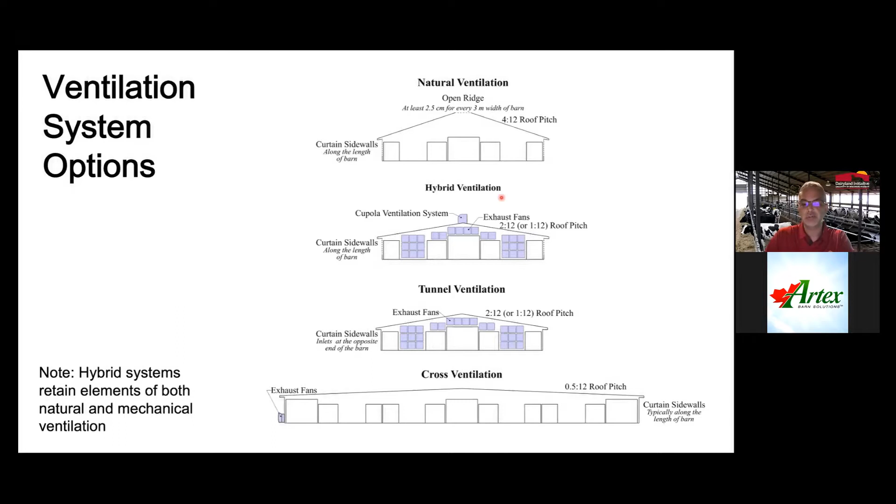Just some terminology when we use the term tunnel versus cross ventilation. When I use it, I refer to tunnel ventilation, moving the air in the direction of the feed lane, so down in line with the feed lane. And there are some subtle differences in how the air interacts with the cows here at the feed bunk relative to tunnel and cross ventilation, where we're moving the air perpendicular to the feed lanes. And so that's what I'll mean by using the term tunnel or cross.

I know some folks use the term cross tunnel, and I don't know what that means. I just get very confused. So this is what we mean when we talk about tunnel and cross ventilation. It relates to the direction of the airflow, generally relative to the feed lanes.

So why all the interest in different systems? Well, I think it relates to the kind of cow we're trying to keep in these barns now. Those older naturally ventilated barns that kept lower producing cows tended to perform quite well, but as cows produce more milk, here a 120-pound average cow creating over 6,000 BTUs, British thermal units of heat per hour. And it's the cows themselves that are driving this. They're generating a lot of heat within that barn. Those older systems are not able to cope with that.

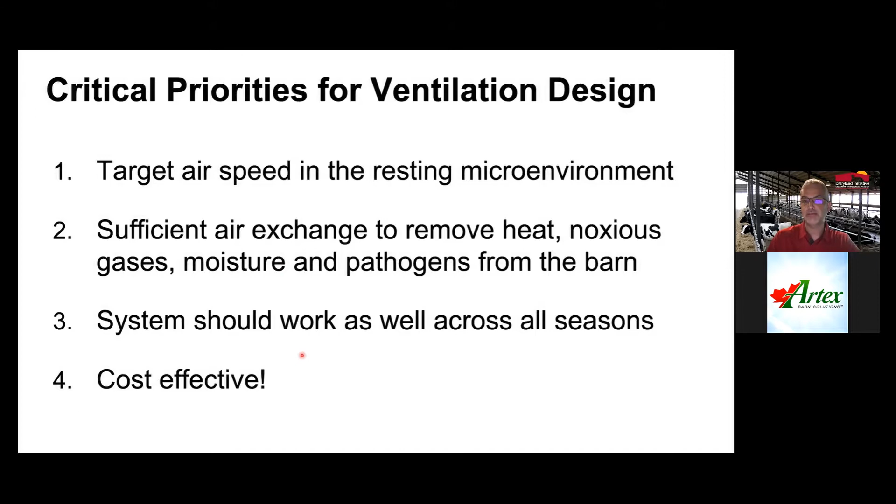And then the 4th piece is making sure that within the region that we're building these systems, the system has to be cost effective. It has to pay for itself. So those are the critical priorities for ventilation design. There are some practical design recommendations, and unfortunately, the engineering research hasn't honestly kept up with the changes to the cow. I mentioned earlier that higher producing cows produce more heat. They're likely to need different recommendations. And so we're left creating rules of thumb based on what people are doing.

Typically air changes per hour, 4 to 8 in the winter, 40 to 60 in the summer. And just the way these barns are built, we usually end up at around 40 air changes for tunnels, about 50 for cross vents. Ensuring sufficient air exchange per unit body weight for the summer: generally, we're specifying about 1,500 CFM per adult cow, but that's where the research kind of lags, so that's a guesstimate. Really, I underemphasize cross-sectional airspeed. There's too much emphasis placed on that, particularly in tunnel designs. The air doesn't distribute evenly, so we shouldn't look at it. Again, the focus is on impacting where the cow lives.

But we would use cross-sectional airspeed when specifying a cross vent with a baffle, looking for 400 to 500 feet per minute, 2.5 meter per second air running underneath that baffle. Finally, we design around inlet speed to make sure the air comes into the barn and mixes effectively without limiting flow to the fans, typically around 500 to 800 feet per minute. And if you want to convert these into miles per hour, divide by 90. That's the conversion that you'll need.

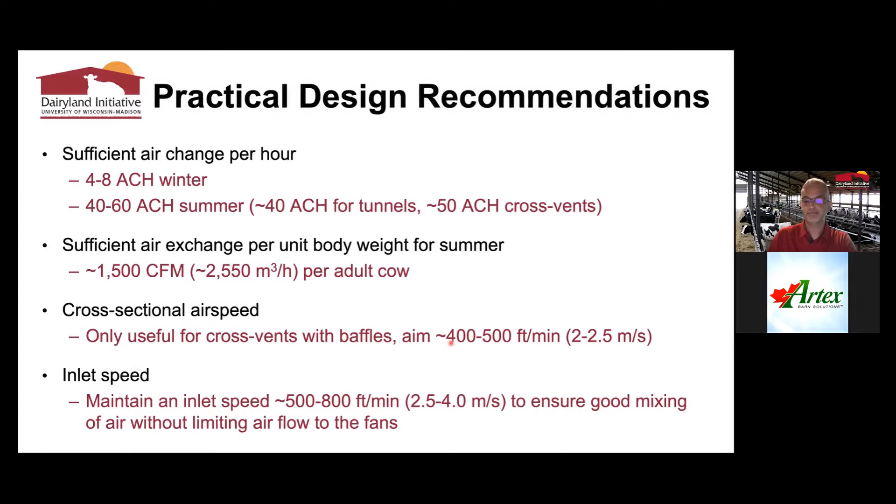When we talk about the airspeed that the cow needs in the stall, particularly during the summer, we've defined what we call MCAS, which isn't the thing that crashes Boeing jets. It's minimum cooling airspeed. This is defined as a minimum of 200 feet per minute or 2.25 mile per hour air measured at resting height, just 1.5 feet off the floor within the stall. And the current research that we've looked at suggests there's little benefit in exceeding 400 feet per minute or 4.5 miles an hour in that resting area. That's what the research says at the moment.

We're actually doing a study at our UW Arlington facility this summer, and what a gorgeous summer it is for heat stress research. We hope by the end of the year to have some better information for you on target airspeeds. And so this is an area of active research. But this is where the literature points us towards right now with regard to our design methodologies.

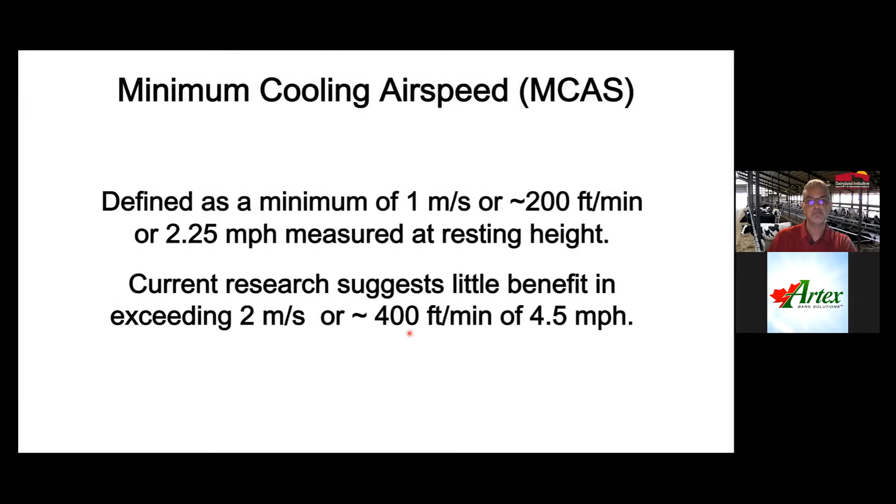How do we measure it? Well, here's Dr. Mario Mondaca, who developed a lot of the materials that we're using and presenting here. He put together this tripod. We're measuring minimum cooling airspeed with a hot wire anemometer. That's located down here, 1.5 feet off the ground. That's our resting height airspeed. Because that's lower, we need a more accurate device to measure it.

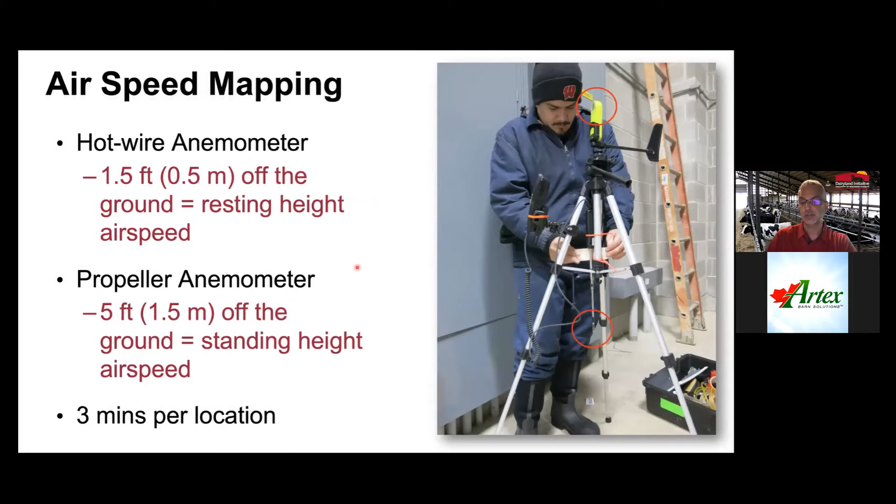As we measure standing height airspeed, you see the little Kestrel anemometer, which is perfect for this job up here, measuring at about 5 feet off the ground. That's your standing height airspeed. And typically we'll move this apparatus around and measure in different locations at a rate of around 3 minutes per location. So here we've got the tripod set up in a stall, measuring resting airspeed, measuring standing airspeed, and we'll follow a different path in a tunnel ventilated system versus a cross ventilated system.

We assume that the tunnel is carbon copied around the center feed lane, so we'll focus in this area, and then just after any crossover here becomes an interesting space to look at different airflows. In a cross-ventilated barn, we assume that they're fairly even around a crossway, and so we'll go across the barn before and after baffles. You can see the baffle here in the blue line to trap airspeed measurements there. So we have a detailed approach that we follow to map these different facilities using this approach.

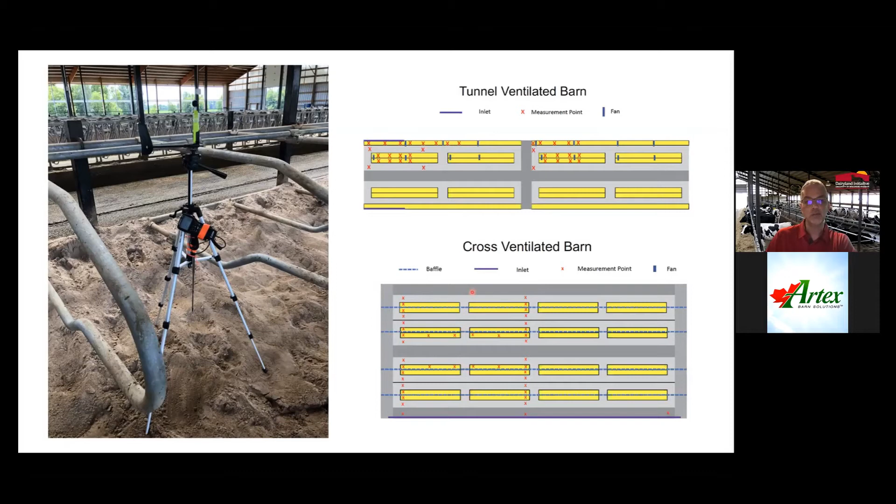Ultimately, when we're making this design choice, it'll be a function of the climate that we're talking about, so the region that you're in. It'll be dependent on the barn layout, whether you want to build a long, narrow barn or a more square barn, whether there are connections to the parlor and other barns that we have to take into consideration. Economics obviously come into play, and I'll talk about that more in a moment. And then there are some personal choices. As you deal with producers, you're going to be looking at things like tolerance for fan cleaning and maintenance. Some farms will tolerate more fans than others.

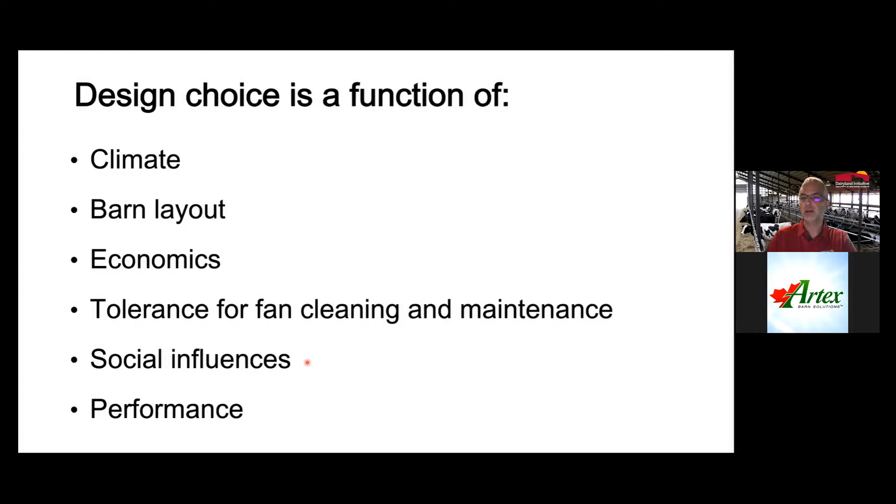There are social influences, demands from the milk purchaser as to whether we are able to let the cows outside if that becomes a demand for the future milk contract. Whether aesthetically these low roof barns pass that test or not. And then there's performance. And what I'm going to say is that, again, we can design around the different choices that I'm talking about to make them all work. So installed to operate effectively, you've got 4 options. But equally, they can be designed and installed to fail, so they can be done badly. But I will say that there are better choices than others under different climatic, social, and economic circumstances.

And that's where, as a workshop, when we've run these workshops multiple times now, we haven't laid out these more accurately, and I'm trying to do that in this presentation today. So this is my first go round of trying to give you some pointers as to where we would build these different facilities. And obviously there's some personal bias in those choices as well, so bear that in mind.

And I still believe if we have the right location, we can build naturally ventilated barns and they can operate successfully under a varied climatic situation. And when you choose natural ventilation is a variable climate, so hot summers and cold winters, but probably not too hot and humid. Under those circumstances, there may be better choices to go fully mechanical.

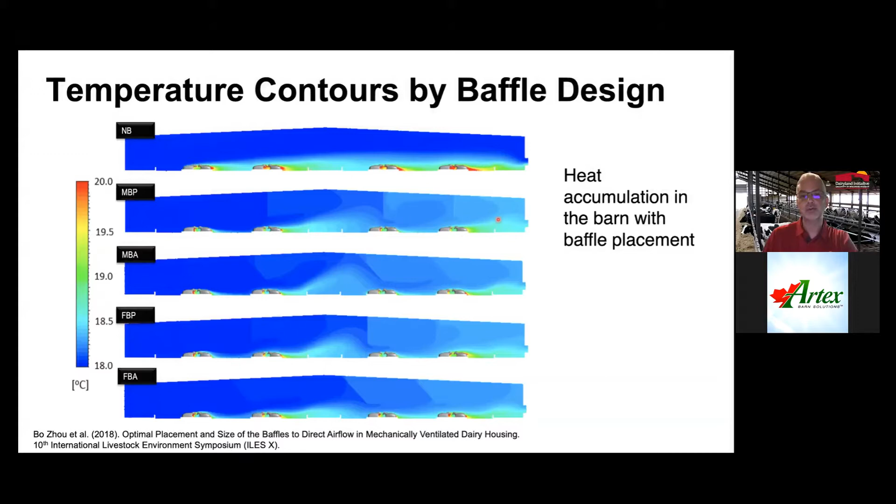So when to choose a cross baffle? Variable climates with retractable baffles, wide body barns, I'd probably go up to 10 rows of stalls and probably no more, where electrical costs are high, because these barns can be built very efficiently, in milk markets that favor 24/7 confinement, because once you turn these systems on, they are not flexible. You can't just open the doors and let the cows out, but they do allow for evaporative cooling.

So the wide, long inlet that you have within these systems can bring air in through an evaporative cooling pad. And so we can use that generally in lower humidity environments. You can build your cross-ventilated barn with fans instead of baffles. And so you take the baffles away and you put the fans up over the stalls, not down their length as you would in a tunnel, but going across, so we get that fast-moving air in the cow resting space. Obviously, it increases costs of operation and installation relative to a baffle system, because we're adding more fans.

But it does allow you to build these barns in variable climates. It does allow you to build wider body barns. You could go more than 10 rows of stalls here, because we can use those fans over the stalls to facilitate the flow of air out of the facility. You'll find dairy producers that just don't like baffles, and so that is a real alternative for them to consider. It's got lots of fans, so we're going to need lower electrical costs. We're going to need a milk market that favors confinement 24/7, but we can also use evaporative cooling with this design.

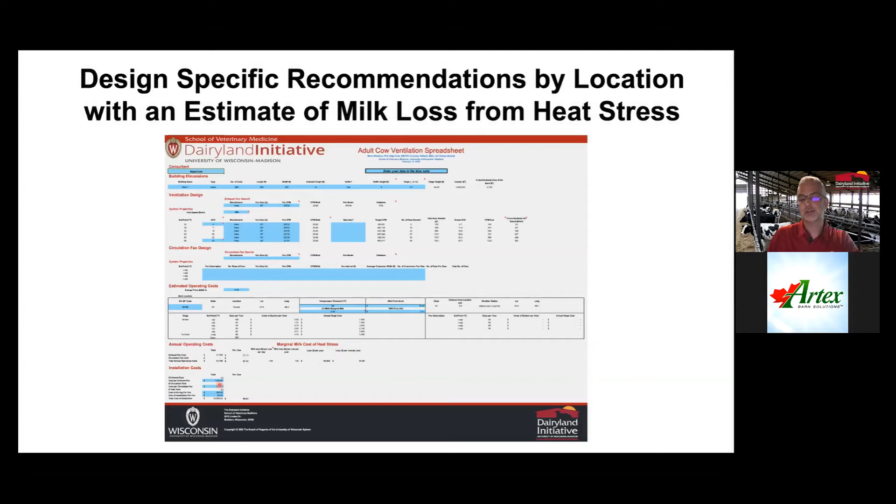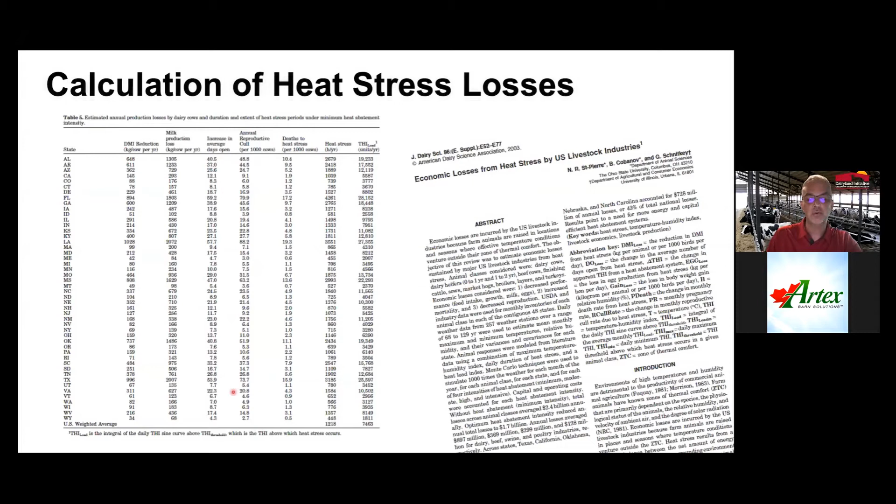And so what I'm going to suggest is the numbers that we come up with that I think are very good may well be an underestimate of the true cost of heat stress. And we've certainly learned the longer term losses of milk production related to lameness and other health impacts that were very difficult to model in this original paper.

So here we have it. We have an example here for Green Bay, Wisconsin. In Green Bay, Wisconsin, there are 66 days per year where the temperature is above 68. So you got that there. We can calculate the marginal cost of heat stress for Green Bay.

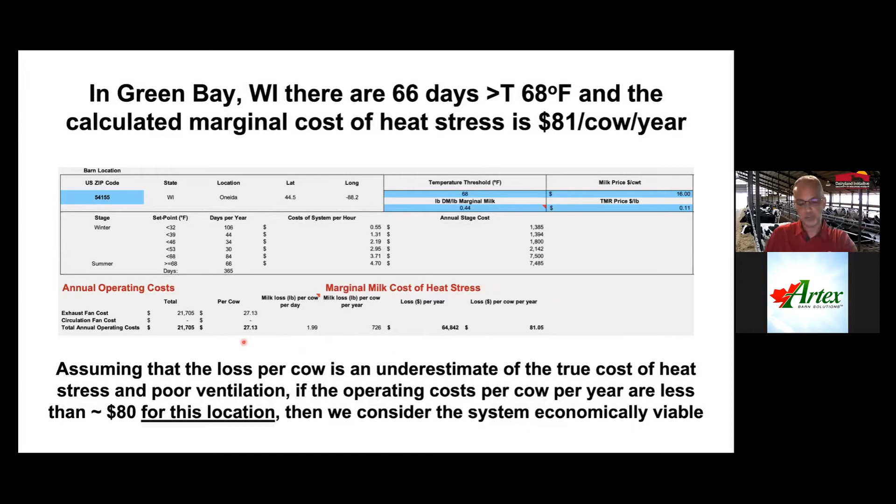It's about 81 bucks per cow per year, based off losing about 2 pounds of milk per cow per day on average. So assuming that that loss is an underestimate of the true cost of heat stress, we're going to say that if your operating costs are at that level or less, then likely this ventilation approach is economically viable.

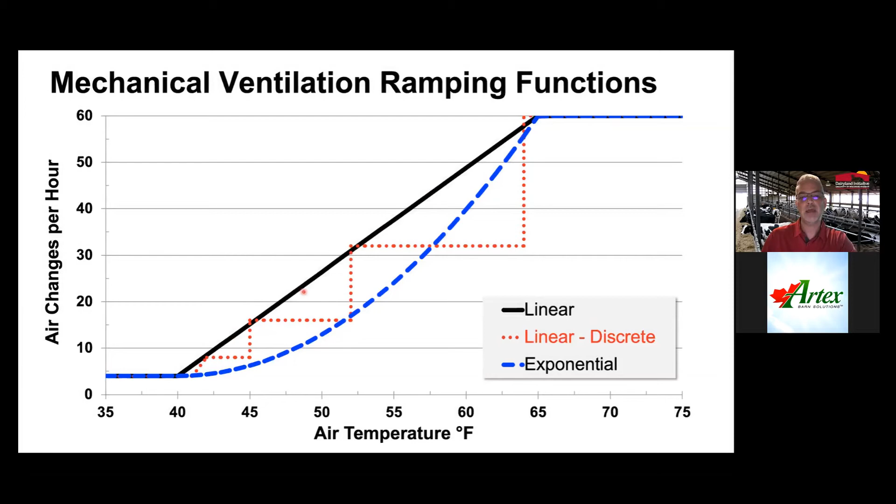We can do it in a stepwise fashion, staging different fans at different temperatures, or we can do it in a very sophisticated exponential curve here, likely using some of the biofeedback and more sophisticated variable frequency drive systems that we're starting to see used within fan systems now. So how you get from A to B can make some significant changes to the cost of operation. And you can see that here.

This is the concept of biofeedback, as Ian Atkins was a grad student working with Mario and Dr. Choi in the biological engineering lab at UW. Ian developed this little respiratory rate monitor that we tested and had some fun with. But this is the concept of biofeedback. Instead of using ambient temperature to operate our facilities, why not ask the cow and get information about her level of heat stress and her needs to drive these systems.

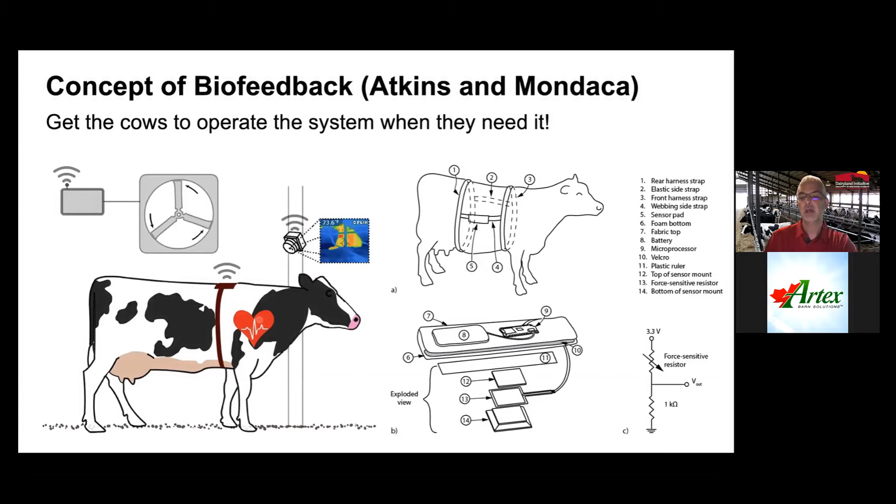And we're actually starting to see a reality of this type of approach within the industry now, which is really cool. So control function refinements, we might save about $7 per cow per year in savings in Ian's work when we looked at variable speed fans. That was applied to, I think, a cross ventilation scenario. We might save about $5 per cow per year when we look at an exponential versus a linear ramping system. So a system that's very specific and tighter controlled.

And then the option of biofeedback and optimizing these systems is real. It could in total be $12 per cow per year or more in savings for these systems. But that means these biofeedback systems have to work at a relatively low cost. We can't spend $50 per cow per year to invest in a very high-tech system and only save $12 back. So these systems have to prove their worth. And again, when electricity is cheap, it's generally better to err on the side of caution, to over-ventilate, because the benefits are huge.

Different fans have different recorded performance. And when you're working with a fan sales company, they'll have a measure of airflow, CFM, at a different static pressure for the barn. Normally we spec negative pressure barns at about 0.1 inches of water. They'll have a ventilation efficiency ratio, the CFM you get per watt of electricity. And then we'll have the airflow ratio, which is basically telling you how well these fans perform relative to different levels of static pressure. And that might come into play if we're asked to design a facility where we have to force air into the oncoming wind. You'll need a higher quality fan with a better airflow ratio under those circumstances.

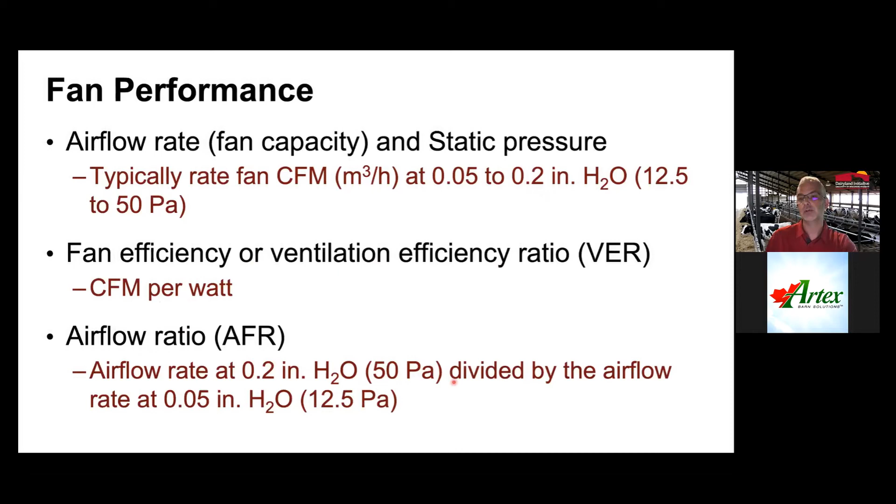So just to give you an example of what this all means, I've chosen an individual fan manufacturer, and I picked a 55-inch fan, three 60s and a 72-inch fan, and this is their CFM output. You can see the lowest is at the 55-inch, the highest at the 72 as expected. But here you've got the CFM per watt. You can kind of see there are some more efficient fans and some less efficient fans as we look at that rating.

So specifying a 40 air change an hour tunnel barn for Madison, Wisconsin, housing just over 1,500 cows. Using 55-inch fans, we'd need 87 fans. And we can go all the way down to 48 fans if we use these larger capacity 72-inch fans. So we can vary the number of fans in this facility almost twofold. Okay, and there's some points of preference there and some design things that we may have to skirt around that may lean you towards fewer fans or more fans.

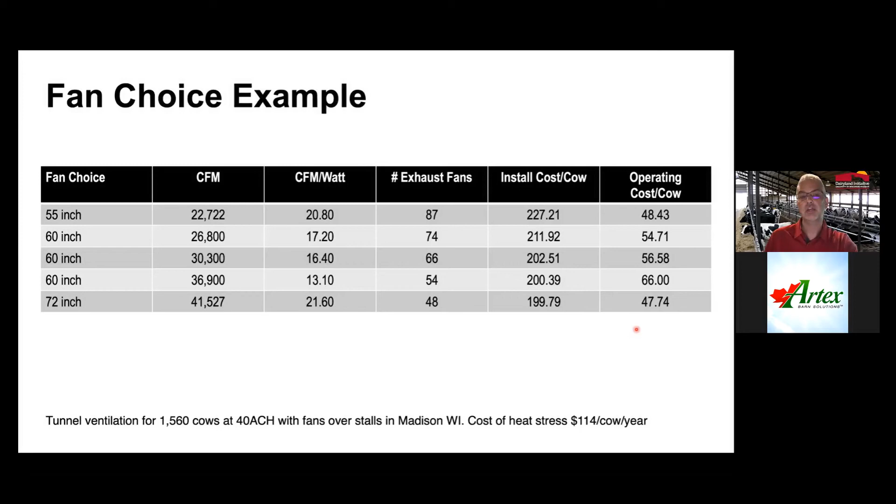Cleaning and maintenance is an issue. We can install the best fans in the world, and if you let them get covered up in goo and bird crap, you will reduce their efficiencies by 24% or even more than that. And so if you install a fan, just remember that's a fan that you have to clean and maintain. So bear that in mind, and that helps us sometimes when we're making choices as well.

So I think I'm close to my 50 minutes, and I'm going to summarize that we've got a wide variety of different ventilation options available to us to help especially cool cows in the summer. These systems can be designed to be appropriate for the climatic conditions. They need to be economically viable and effective all year round. And then leaving you with a big message that fan choice is really important.

So a lot of the workshop attendees complained that, well, Dr. Cook, you didn't tell us what system to use in what circumstance. So this is my attempt to try to do that. So I've looked at the 7 different systems. I've looked at climate choice, preferred stall layout, relative electrical cost, requirement for fan maintenance, outdoor access, and other factors such as topography, cost of installation, barn length, baffle usage, and so on.